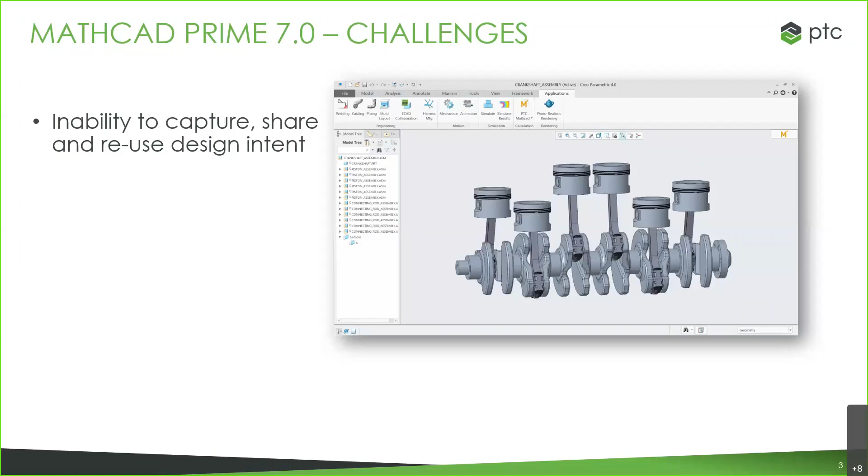You need to be able to capture that thought process so that you can reuse it, share it with others for design reviews, validate against design requirements, and reuse the design intent for product updates later. Someone on a different team, or in the future, who didn't work on it the first time around will have to start from scratch if you don't capture all of this the first time through. That's very time consuming and can lead to errors - not the most efficient way to do it, but something we see pretty often in the industry.

This is mainly because there's a lack of process and tool standardization. Maybe you have design requirements coming in from different emails, different calculations done on different pieces of paper, or a program in some software calculation tool where you're doing math and making decisions on the fly, changing and crossing things out in an Excel sheet to figure out your model. This makes it really hard to aggregate that data, flow through your process, and reuse any of it. You might know how you arrived at your answer, but nobody else will be able to figure it out, and if there's rework needed, it's hard to go back and find where you went wrong.

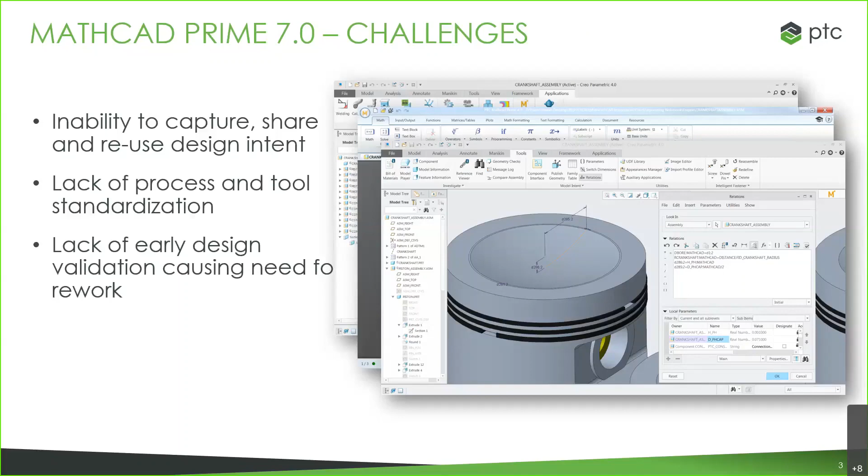We also see a lack of early design validation. These things are too difficult to do, so you take your best guess and try to validate through analysis or prototype, and often things are wrong. You didn't meet your design requirements like you thought, and you have to go back and do a bunch of rework. This is very time consuming and expensive, because you used a guess-and-check method or just went off a past product. Having a tool that allows early design validation with equations and tables of values is a much more effective way to get it right the first time through.

All of these are addressed by Mathcad Prime 7. This is our solution from PTC - a digital engineering notebook that allows you to perform engineering calculations and manage your design intent at the same time. It's a standalone application, but you can work with it alongside your CAD system. It does a really good job combining the ease and familiarity of an engineering notebook, where you write as if on a whiteboard, all in natural math notation that makes sense. But it also has a powerful mathematic engine that not only does your calculations, but ensures everything in that notebook is completely up to date, so you won't have errors where units changed earlier but weren't updated in a later calculation, leaving you working with numbers that shouldn't be together.

So this is how Mathcad Prime works - it uses that engineering notebook to assist your thought process, assist your design, and have it all correct and documented at the end. Now let's look at some of these capabilities.

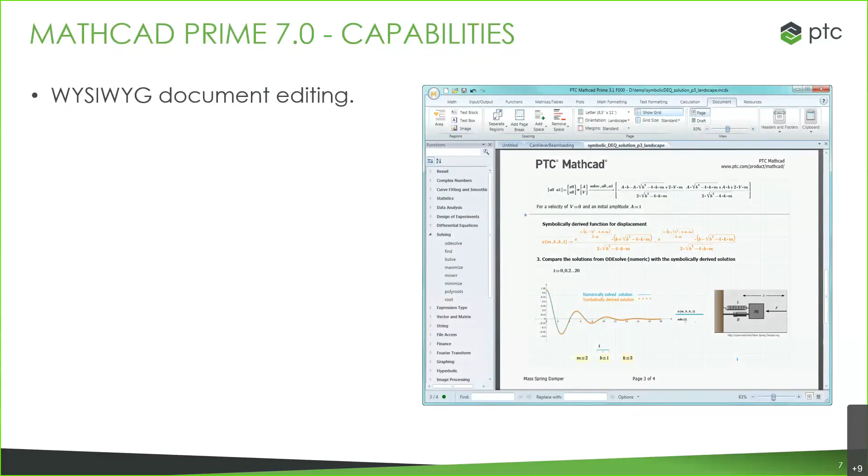What you see is what you get. That means that there's no funky formats that are going to go on if you're trying to print this out as a PDF, print as a hard copy, or send in an email. The format that you see in your Mathcad view is how it's going to look when you export it. Things aren't going to get moved around, images aren't going to not show up. It's going to look exactly like this.

It has a rich numeric function library, so you don't have to type all of your functions in. It has a lot of these functions for you, but it also understands that function notation. So as you type in your own custom functions, it'll understand how to calculate that and use the variables that you're assigning to solve. You have a lot of plotting capabilities.

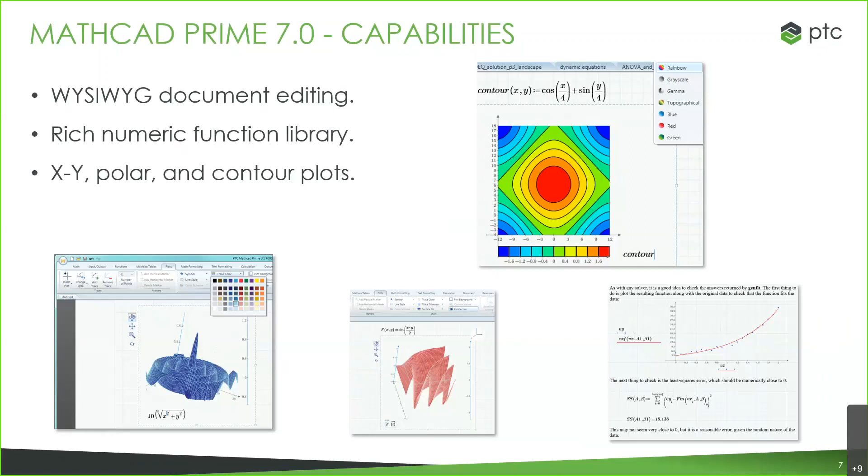X, Y, polar, and contour plots are all available. 2D, 3D, and the contour views are highly formatable. You also have access to other programs such as Excel, where you can format all sorts of plots and bring those in as well. So it doesn't limit you in terms of visualization, makes it easy to do.

So what's new with Mathcad Prime 7.0? There's a lot that's new. The big one is a standalone converter. So you can actually install legacy Mathcad, and it's not needed. Legacy Mathcad installs are not needed in order to convert your legacy Mathcad documents. So this one is a big deal. Or if you have Mathcad documents that you're using already that have documented past processes, you can bring those into Mathcad 7 much easier than before.

We have combo box input control. So this addresses a high priority gap between the legacy Mathcad and the Mathcad Prime. It actually allows you to convert for all types of legacy Mathcad web controls. You also have that left-hand side for definition, which is very useful and long awaited.

We also have Symbolic Engine enhancements and updates. So a new Symbolic Engine that is built out further and has more recognition for different symbols that you might use.

General usability improvements as well: scroll, focus, zoom enhancements, things like grid line control, and the ability to save as a PDF format. We also have an improvement to APIs. So we have a guide now in the help documents that you can go and read about all of the API capabilities that you have.

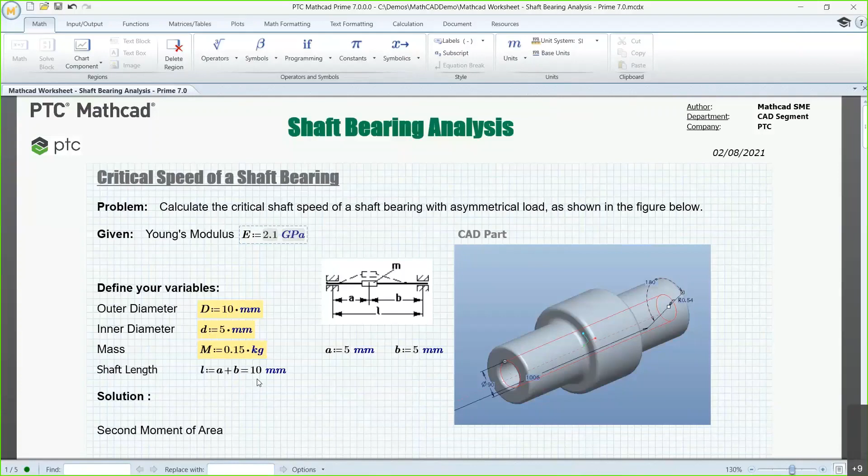You can even bring them in from a live document so that if there are updates made to it, those would update as well. That really allows you to define the variables completely so you can do your calculations and know exactly what you're working with.

So for this, we're going to calculate. We need to make sure that our shaft speed is going to be above the critical speed that we need for the shaft, which is one of our design requirements.

You'll notice it's very easy to type in this formula notation, this natural math notation. You can add in your multiplication, your parentheses, your fractions. This is going to be that outer diameter, capital D, to the fourth, minus your inner diameter. And as soon as you hit equals, it gives you the result. It's actually using the definition of pi, which Mathcad knows, as well as that inner and outer diameter that are defined above.

Now the units are another benefit of Mathcad. Right now SI is the defined system, so meters - the results are going to be given in meters, which is the default for SI. But you have a whole list of units that you can choose from.

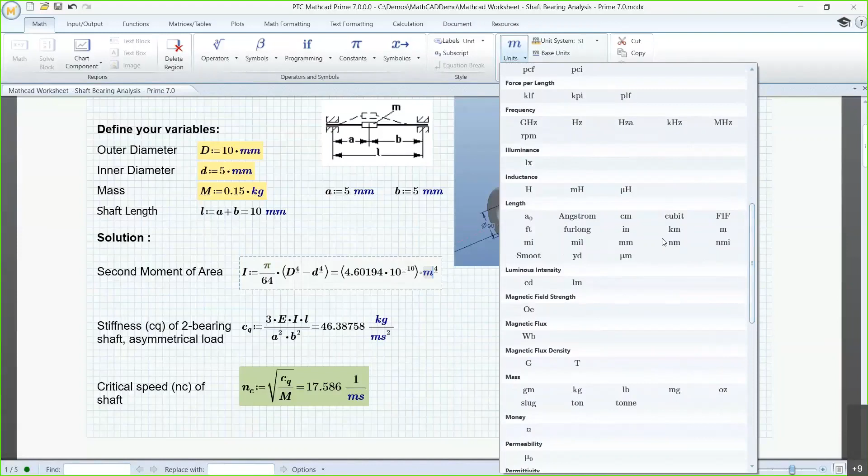You can choose them from this drop-down menu. So for example, if you want to change to centimeters, as soon as you hit enter, that will update your results. Like I mentioned, this is live math, so as soon as something is changed, all of the results and calculations will update to reflect the accurate and correct result based on what's written in the document.

You can also change your units by just rewriting them. So millimeters are recognized by Mathcad, and as soon as you hit enter, it recalculates that as well.

Down here is our critical speed. Perhaps we want it in RPM - that number will update. Then we can also start experimenting. As soon as one of your definitions is changed, it uses D in that formula for I, which gives you the CQ value, which gives you the shaft speed. So if you change D, it's going to update your critical speed of the shaft.

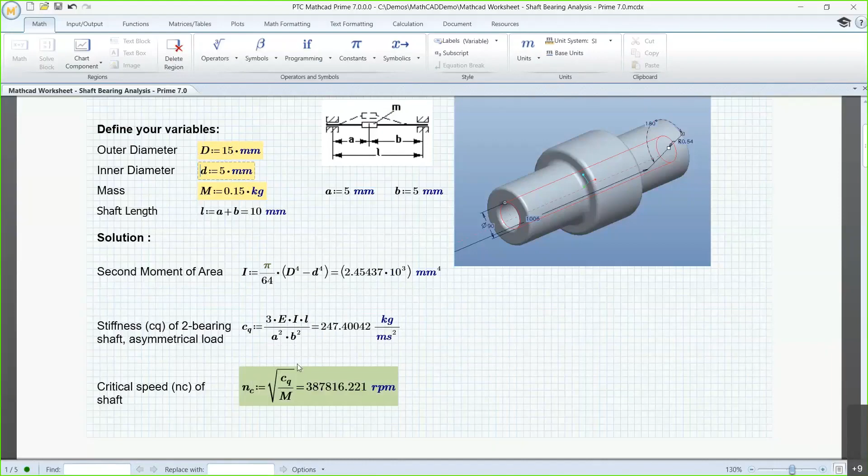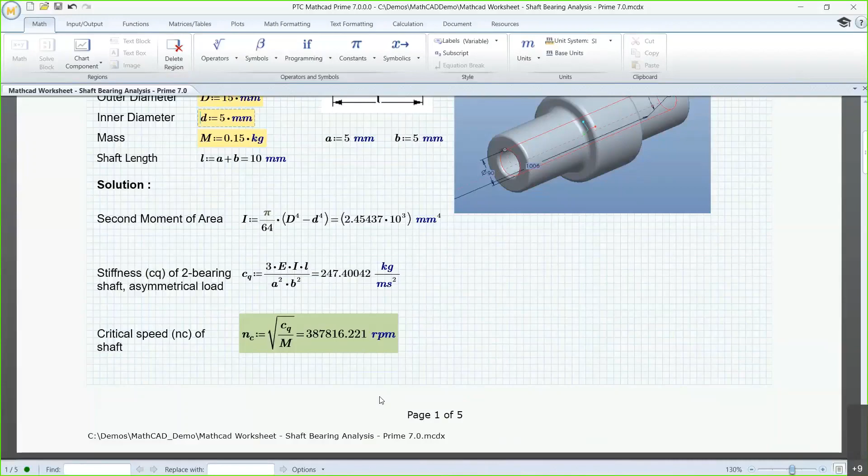Now you can see that would be pretty repetitive to have to go back and look at each option you have for the diameter to see what the speeds are. That's not very realistic for an engineer to do. So we've documented now how we got that critical speed of the shaft, but what if we want to run through a lot of different options for the diameters?

That's actually what is set up right here. So the problem statement up at the top: can we vary the number of inputs per variable? And with Mathcad, yes, you can.

So one thing that's useful to do is to set that threshold limit for the RPM. We're actually going to run, on the left here we see all of these equations. These are the same equations from above, but we're going to have those in the for loop.

So it'll run through multiple values for each of those variables we want to define, which is going to be capital D and lowercase d. To assign multiple values to each of those diameters, we can use a table. Up here in the matrices and tables ribbon, we see the insert table function, and we have options for how many rows and columns we want.

This inserts a table, and it gives us that header where we can define the variable, choose our units. These are going to be in millimeters, and then we simply enter in those values. So D would be 13, 12, 11, 10. And this actually defines them as vectors, so this isn't just a list—it's actually going to define capital D and lowercase d as vectors.

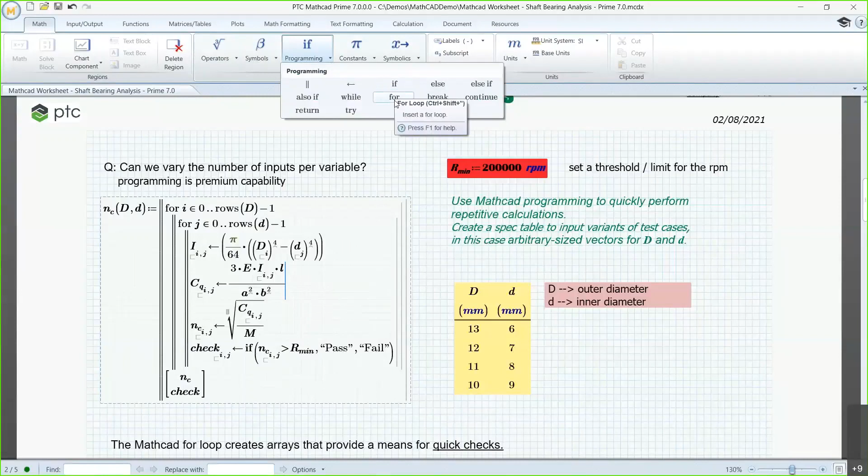Basically, you have one for loop for capital D and one for lowercase d, so it's going to run through every single combination of these two inputs you could possibly have. At the end, if you look at the bottom of that block, you can see NC, which is going to be your critical shaft speed, and a design check. That checks your result for each of these combinations against the critical speed we had up at the top.

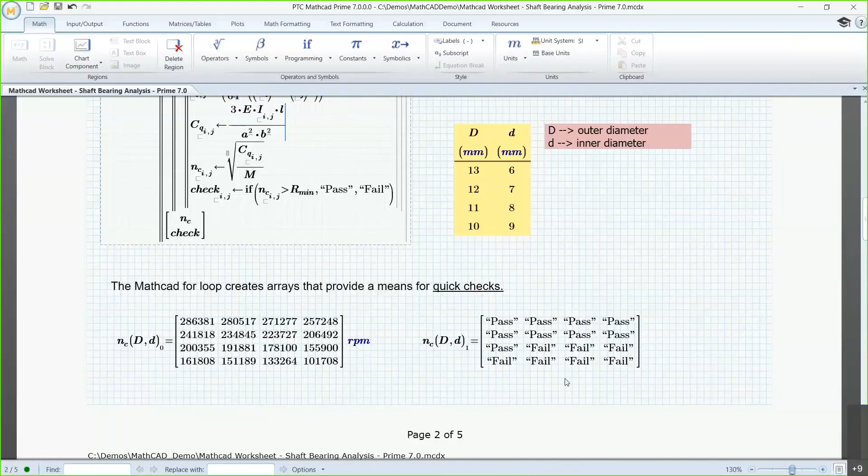The results then give you two different tables of results: the critical speed, which is just a matrix nc, and then the pass-fail matrix. So it would say for each of those results we get, whether or not that combination of diameters would pass our requirement or fail our requirement.

Now it's a little bit hard to understand those matrices because there's no labels, there's no headings. So down here, we actually have a section where this little formatting line will give headings and labels to each of the rows and columns.

Now this whole area—if you see this dotted line, this is what we call an area in Mathcad—and the little plus or minus sign allows you to collapse or expand this area. We don't necessarily need all of this formatting to be shown, because all we want to see is the final formatted table maybe, so all of this could be collapsed. It helps you clean up your document, doesn't distract from what's necessary.

And then you can take it one step further and actually protect the area. So maybe you're not just cleaning up your document, but you're protecting company IP.

You don't want people to see something that you're doing because it's sensitive information. So you can actually give this area a password and choose, do you want it to be expanded or collapsed? Collapsing it would mean you're going to protect that area. Only people with the password would be able to see this information. Leaving it expanded is another option to protect it.

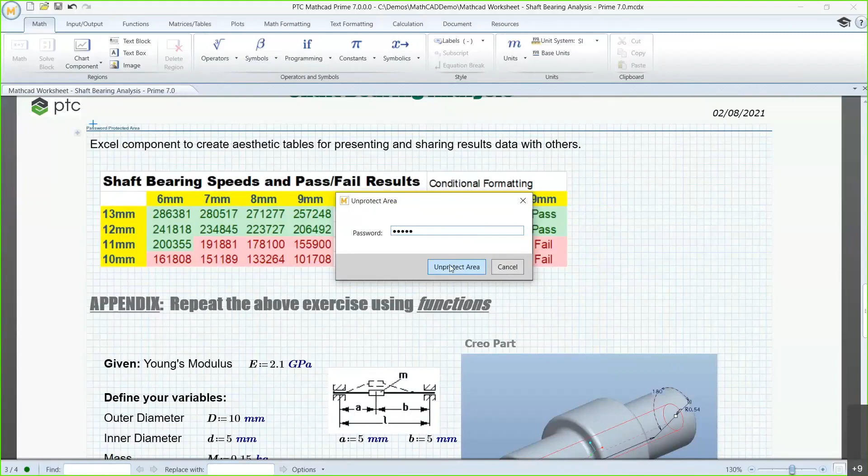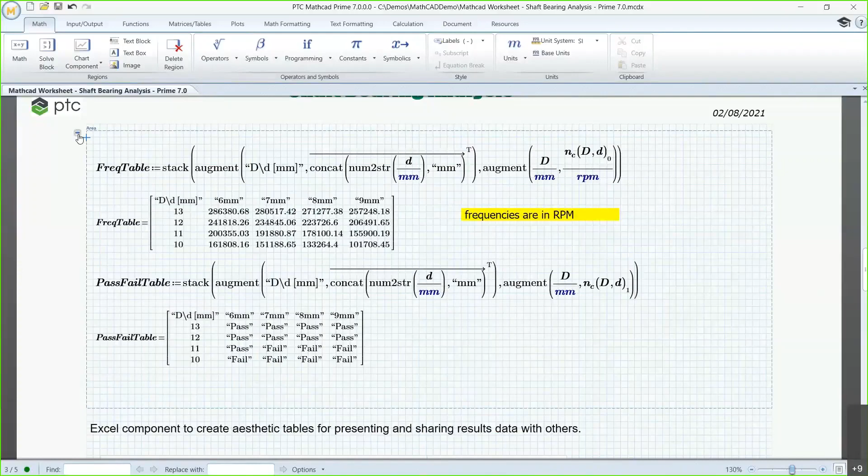Maybe you wanted to make sure that nobody changes those formulas. So here you can see that you cannot expand it without the password. If you go to expand that area, it'll ask you to give the password. Leaving it expanded is useful if you want people to see those formulas, be able to use them. But if you don't want them to be able to change or edit what's in this area, you can password protect it, leave it expanded, and then they won't be able to edit. They'll only be able to view.

So these are the final tables here. These are the results. You can format those easily. You just select the area and you can highlight those or color them.

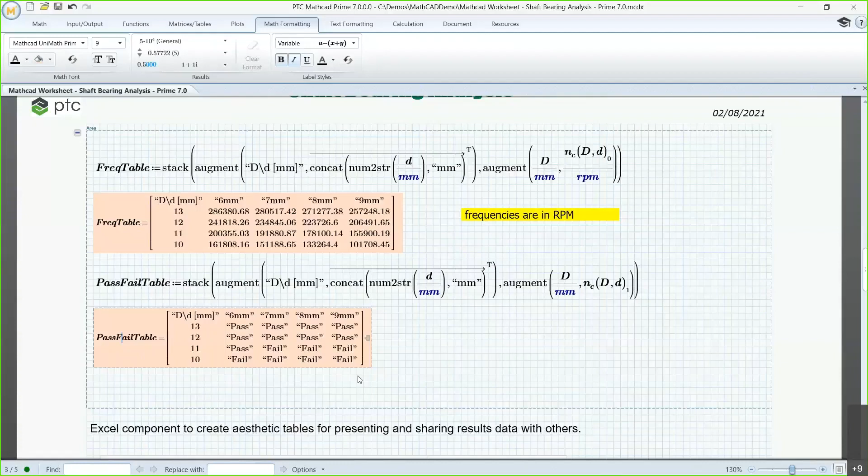Now with Mathcad tables, this is very formatted for Mathcad. You have the headings and the labels, and they're highlighted, but you can't highlight specifically the heading column or the label column. You can't do conditional formatting if the pass and fail need to be highlighted.

But you'll see here we do have a table that is just that. The labels and headings are highlighted, and we have conditional formatting for which results passed and which results failed. And then you can see easily what diameters those are.

So the way that you would get this table, it's actually an Excel component. And the nice thing about Excel components is that you can take advantage of the full capabilities of Excel and have them visible, completely embedded in your Mathcad worksheet. You can see it's a very seamless embedding. It looks just like an image or something, but it's actually live. It's live data, so these would update as if it was done right here in Mathcad.

So in your input-output ribbon, you have the option for read Excel. This would read information in from Excel. If you already have data in an Excel sheet that you're using, you can read that in, no problem, read it into Mathcad, use it in calculations.

You also have the option for Excel component, and Excel component goes both ways. So we're actually going to take the results that we have and the calculations that we're doing in Mathcad, push them into Excel, do some formatting, additional calculations, whatever it's going to be. Usually it's formatting plots and tables. And this is how we would get that into Excel.

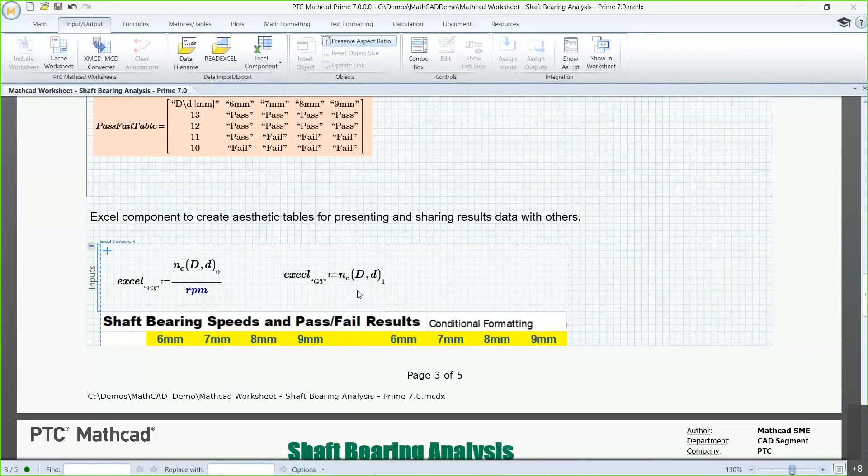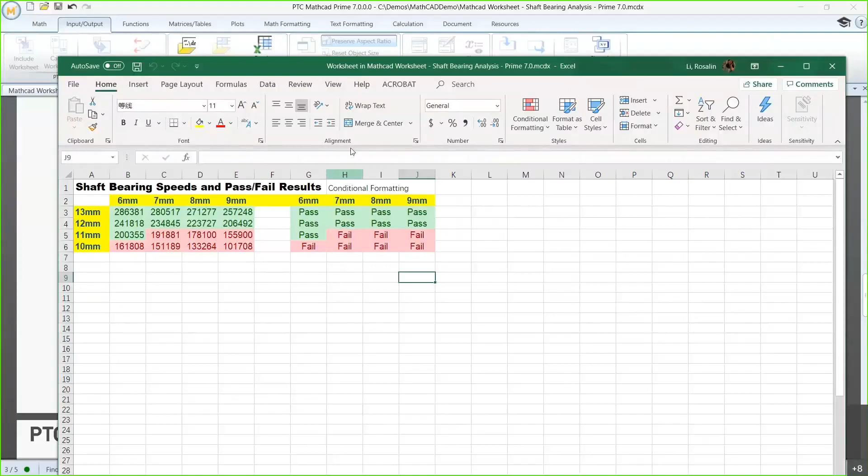We're going to read in the shaft speed in RPMs, and we're going to read that into Excel starting at B3. We also are going to read in, starting at G3, that pass-fail data. So that's how Excel is going to get that information. It's right from the calculation results. So if those results update, so will the Excel sheet.

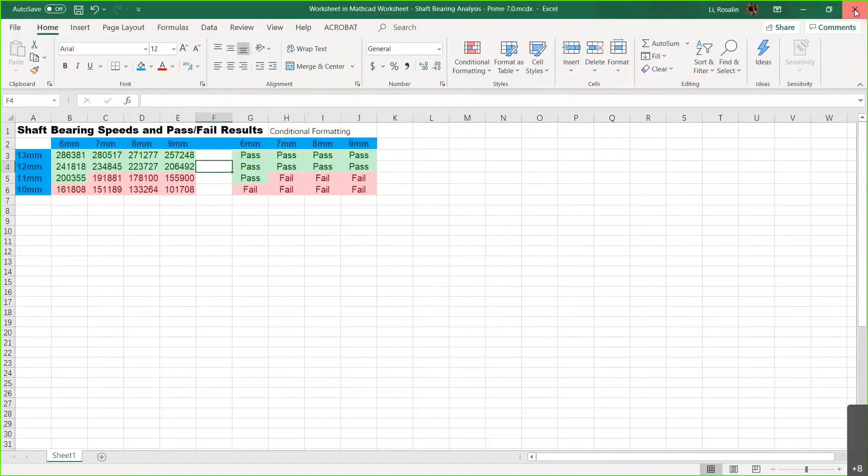You can see here we have that formatting done. And then if we have any changes that are made in Excel, such as coloring changes, conditional formatting changes, plot changes, whatever it might be that you're used to doing in Excel that has additional functionality beyond Mathcad, that will all be immediately reflected into your Mathcad document. These are live, so just like the math is live, so is this connection. The same is true for other components if you're using something from images from PowerPoint or something like that. You can see here that those color changes are reflected immediately.

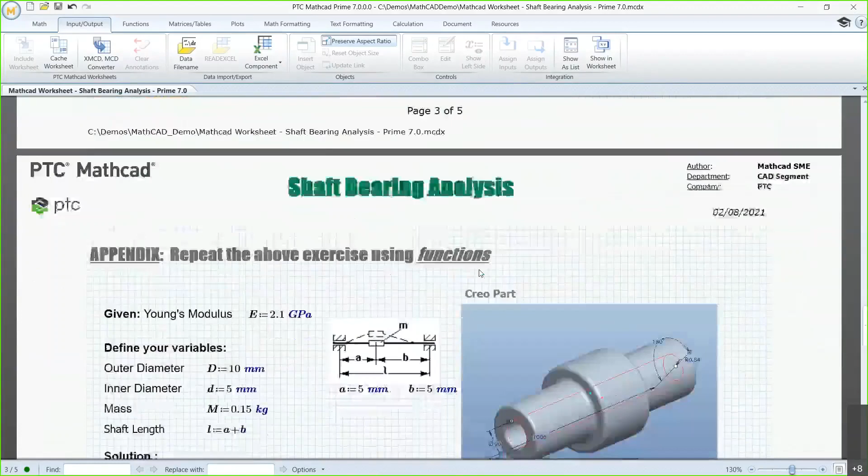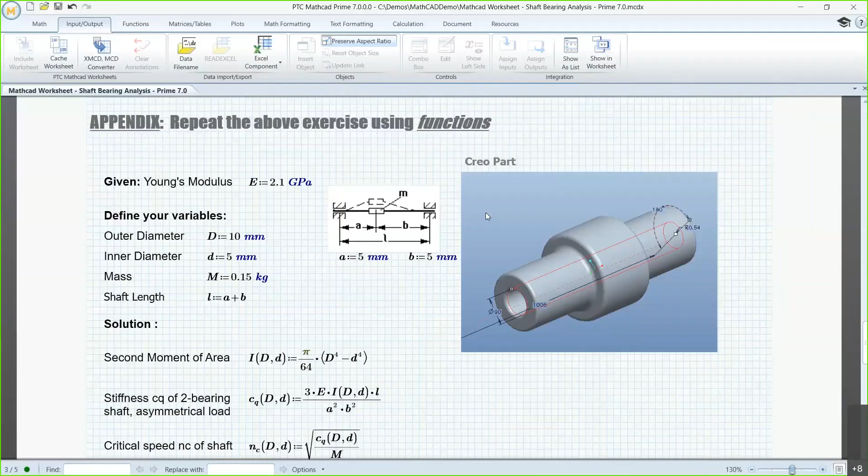Now, to look at one more thing here, this section repeats the above exercises using functions. So this is something that maybe you wouldn't do if you were actually doing these calculations for a project. You probably wouldn't do it two different ways in the same Mathcad document, but for this demo example, we wanted to show off this other way of doing it.

And so you can have the same setup here where you have your variables, your moment of area, second moment of inertia, right? Your critical speed of shaft, have all of your different diagrams and images, and then we could define them, instead of defining them as those equations, we could define them as functions. And so Mathcad actually understands function terminology.

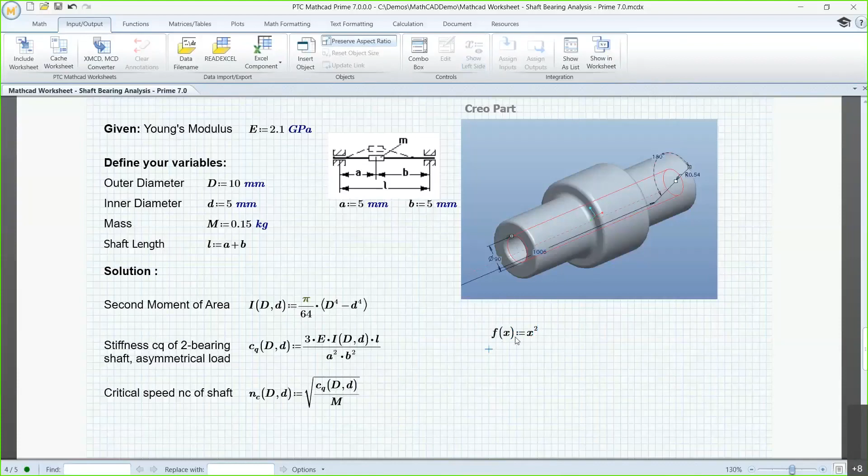So if you type in f of x, it will understand that is the start of a definition of some formula that you want to use with x as the variable. So it's going to be an expression that's a function of x. So you can define this expression as x squared, which is a function of x. So now if you type in f of 9, as soon as you hit equals, it's going to give you the result of that function with 9 as the input.

You can also do this as a vector, so you're not limited in your input to this function. So if it's going to be x, you could have it as a 3-variable vector. Here we could have 2, 5, 7, and then as soon as you hit enter, it's going to give you the results back in that vector format because that's the input.

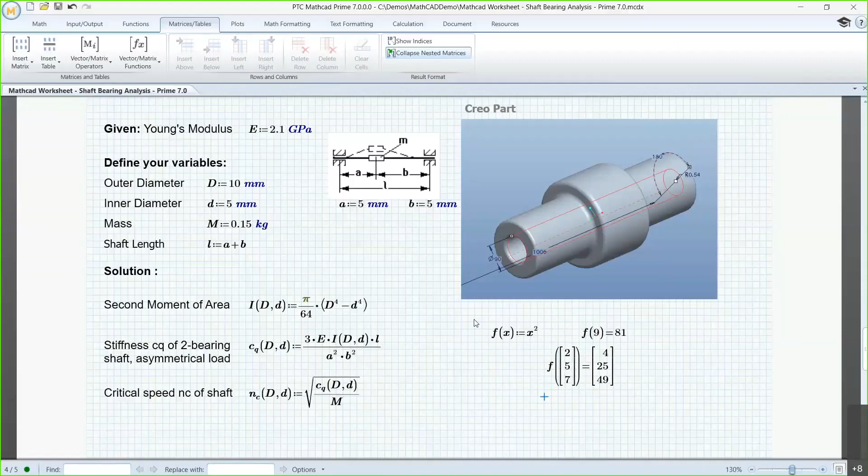So these can obviously get more complicated than x squared. You can have all of the same equations and functions that we did up there earlier defined in this way.

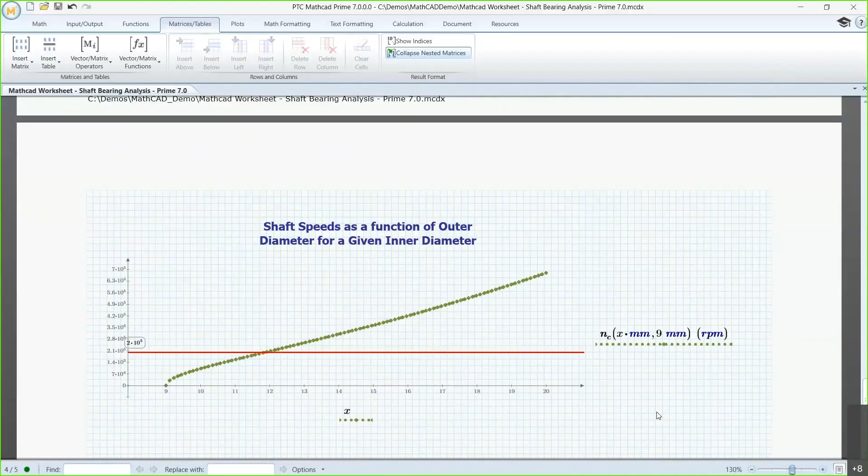One of the advantages of defining your functions in this way is that it makes it very easy to plot. So here, for example, we have a plot of that function. We can see that shaft speed is in green, and that is for a variable of x, the outer diameter, along the x-axis. So we're going to vary from 9 to 20.

And then the 9 millimeters is the set diameter for the inner diameter. This red line here is going to actually be the critical shaft speed that we need to meet. This makes it very easy to compare to our design requirements, because we have tools such as this horizontal marker. You can see right at this intersection, okay, well if our inner diameter is 9 and we need this minimum critical speed, the outer diameter to get that is going to have to be above 11.9, or above 12. So that makes it very easy to understand what our design requirements are and how we're meeting those with the different components.

So we could do a plot of all of these against each other. If we want to compare all of the different combinations that we have, we could do our inner diameter as 5 millimeters - that was another one of the options - and plot that in RPM. Then if we see the outer diameter, we can look at that intersection point of where it meets our design requirement, and that looks like it's going to be down a little bit further.

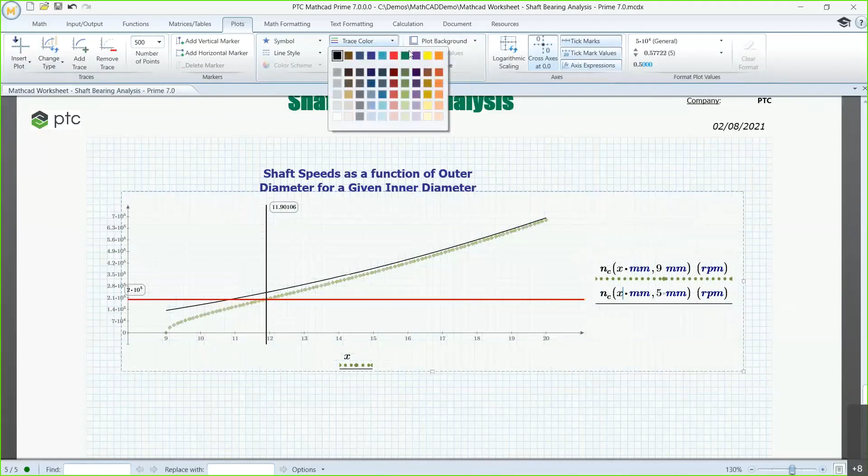Now we can change the appearance of this. We can format these plots pretty easily - it's up here in our plots tab. We can change the color, the thickness, change the symbol, our line symbol, dotted. And then this vertical marker would show you that the intersection point down here is going to be at about 10.8 or so. And so we'd have to be above that.

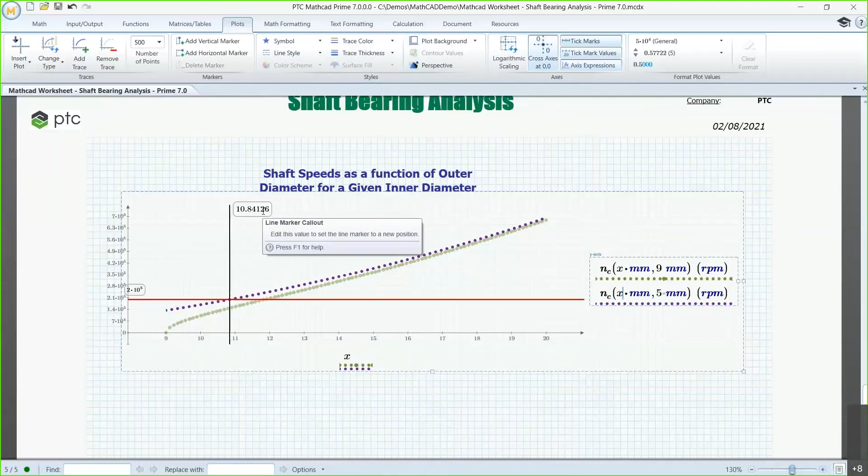Now, of course, we can get more complicated with these plots. We can get more complicated with our functions, but we're understanding our design requirements. We're validating against our constraints the whole time. We're doing it in a very organized, orderly way so that we know our calculations are correct because we can review our work. It's also easy to present in a design review.

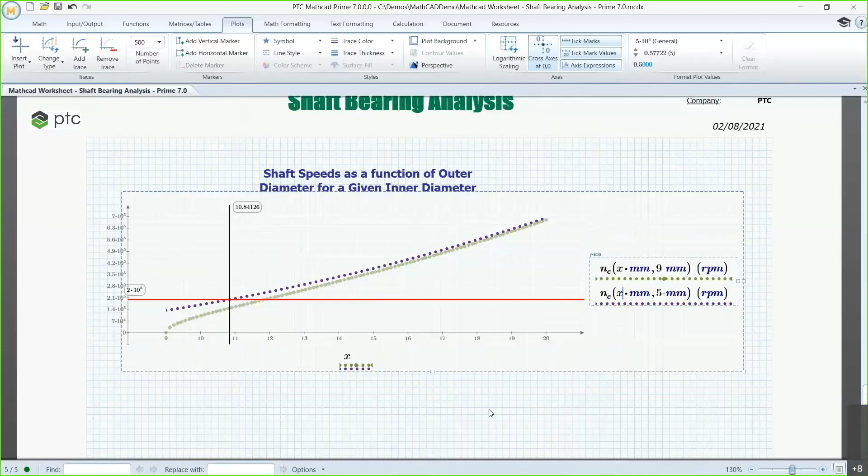Anybody else would be able to review our work and make sure that our logic is sound, that this makes sense. And then when we do decide to use a certain dimension or diameter in Creo or in your CAD system, you would be able to see, oh yes, our final result here that we chose is very clearly 9 millimeters by 14 millimeters for the outer diameter, and then you can make sure that that is what's entered into your CAD model, so that you know you're actually designing the correct part.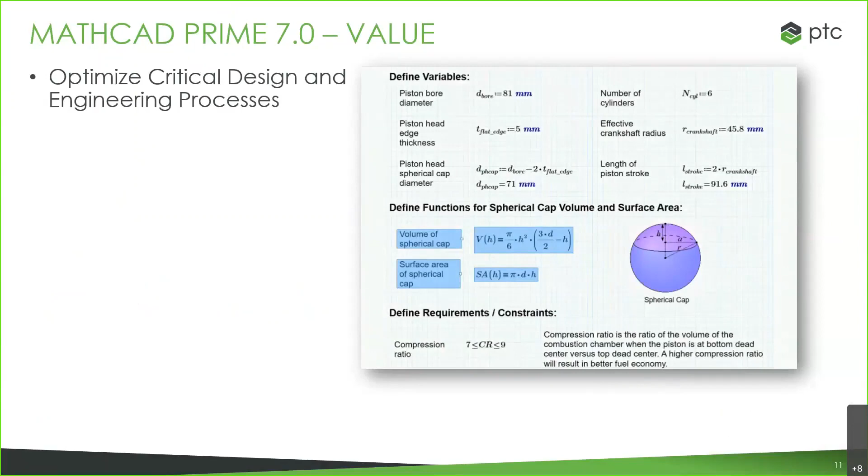So when we have customers who use Mathcad in this way, what is the impact on their design process? What do they come back and tell us? We can see that it's really easy to optimize these critical design and engineering processes when you're using a method such as this. We also see an improved product quality because you're doing your design validation early on, and you're able to review to find mistakes. So you're really making the most optimized product, or rather a product that you know is going to make it through their validation cycle the first time.

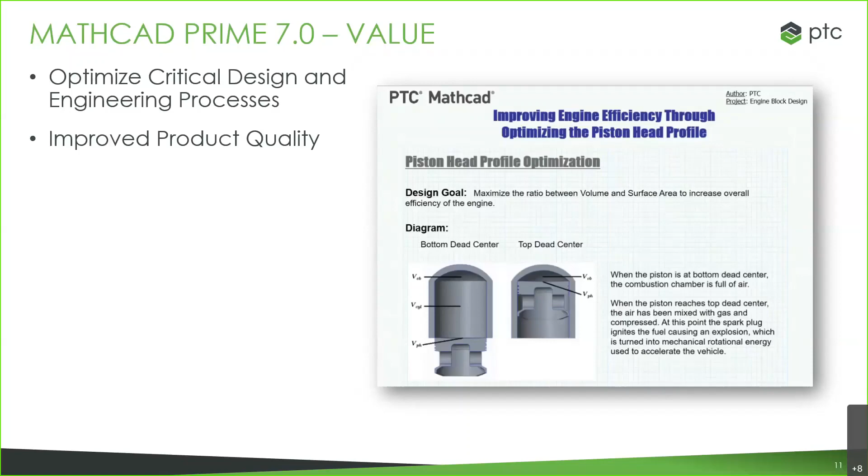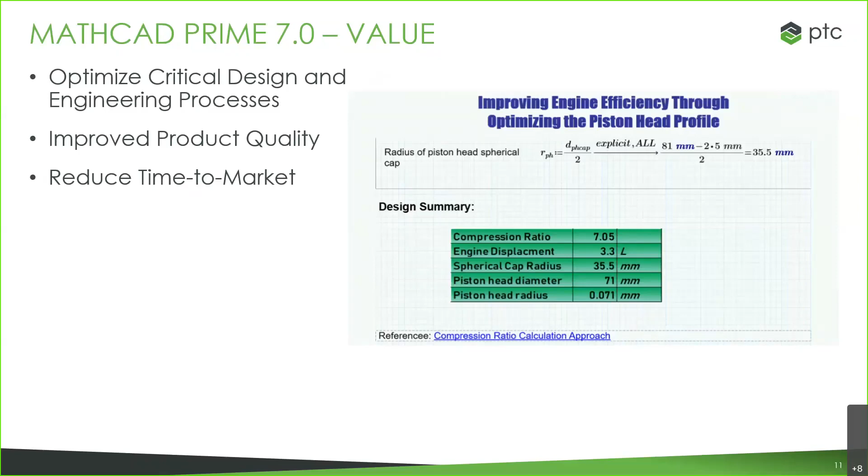You know it's going to work, and you know that this is probably a good use of your model. We see reduced time to market, fewer errors, fewer reworks, fewer times through that design process is going to mean that you're getting your projects done faster. You're getting them done correctly the first time, as well as product updates. It's not going to have to redo all of the work that someone else did a year ago. You're going to be able to take advantage of all of that and simply make some additions and updates. All of this really works to reduce development costs.

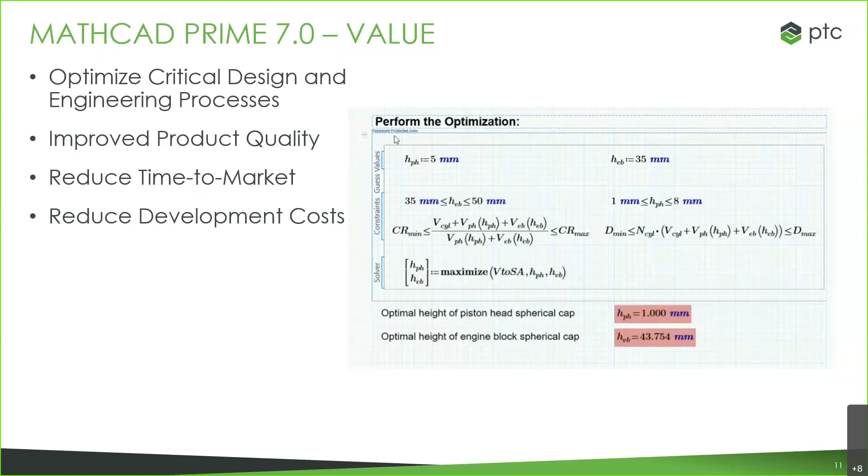You avoid errors, you avoid rework, whether that's rework on a project or rework for having to redo all of these calculations the next time through. And so you can really review the work of colleagues with a common format that everybody's able to understand and doesn't take up extra time just to document. And so this is really where a lot of that value comes in for our customers, and hopefully you see that this is value that you can achieve as well.

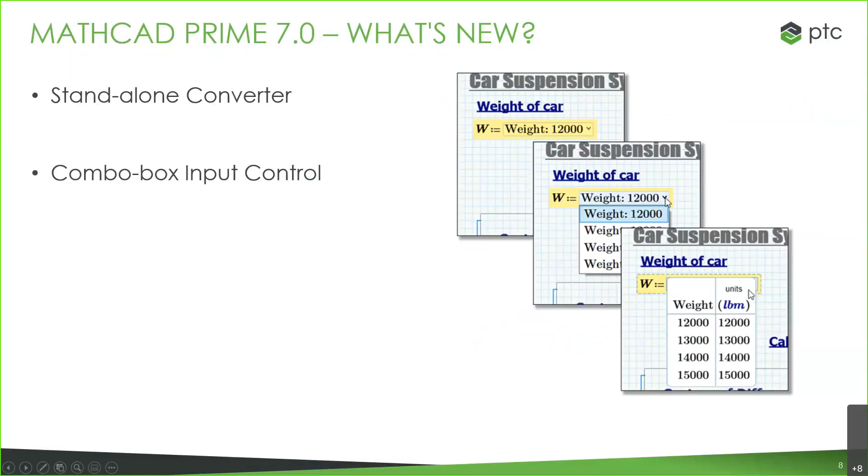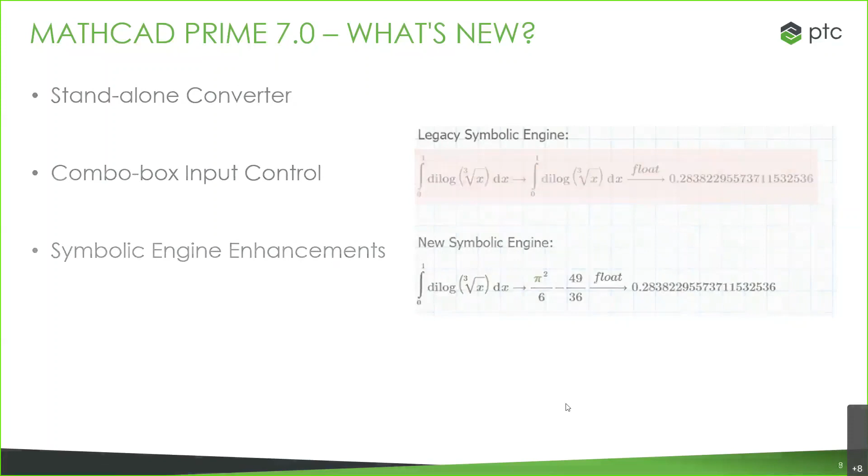Yeah, I do have some documentation on that I can go over with you, or I can rather send over. But a lot of the big key elements is that standalone converter where you're going to be able to convert legacy data. We also have that combo box input control, so you're able to do this type of a drop down, so you have multiple inputs for any given variable. Those are two of the big ones. The Symbolic Engine enhancements - we have improved symbols, the capability to recognize different symbols. So I know that this is relatively vague, as well as the usability with scroll, focus, and zoom enhancements. But does this answer your question, or would you like me to send over some specific documentation?

If you could send something, that'd be great. I just didn't know if it was more than this. So obviously you've already covered it. So that answers my question.

Thank you. Okay, yep. And actually, just to add quickly to what Emily was saying, some of it also is Mathcad, not Prime, but just Mathcad previous versions - I think the last one was 15. Some of the functionality from Mathcad compared to Mathcad Prime wasn't captured, and Mathcad Prime 7, one of the goals was to sort of just close that gap so that anyone that was still using the legacy versions of Mathcad would have that functionality in Prime. So some of that is mentioned here, but I think in the material that Emily is referring to, it shows specifically what some of those are. So some of that was in here, but you'll see that. And the idea was, of course, that way anyone that has that legacy version should have all of that same functionality going forward in Prime.

Thanks, Stuart, for clarifying. I'm sorry, can I ask one additional quick question? Please do. When's this going to be out?